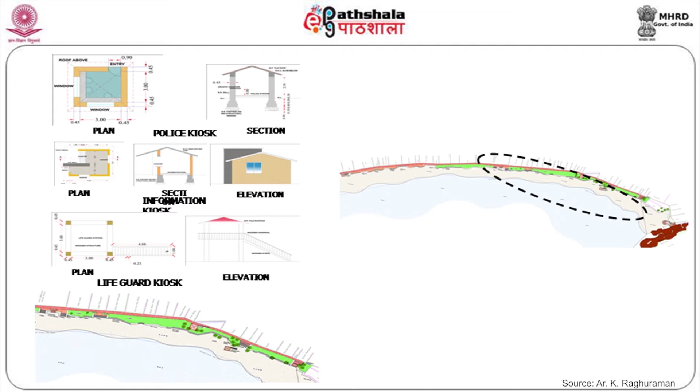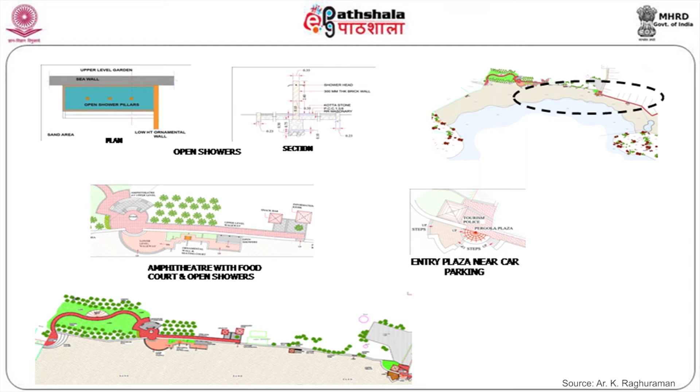Amphitheater with food court and open shower. You have a small amphitheater for people to have a performance, a birthday party, or any such local activities, plus a shower point for people to use and go back.

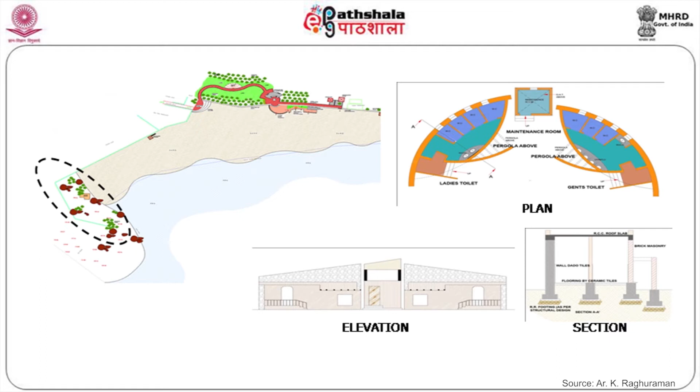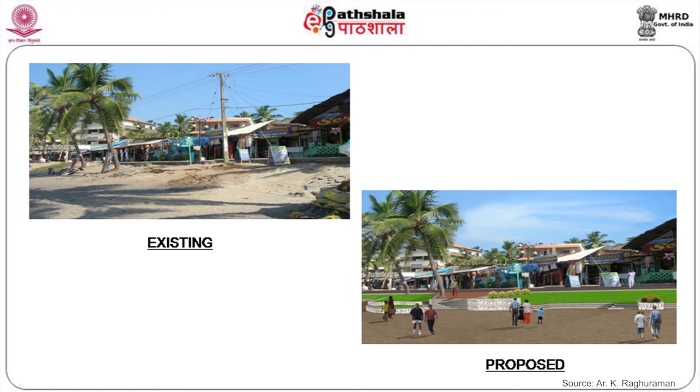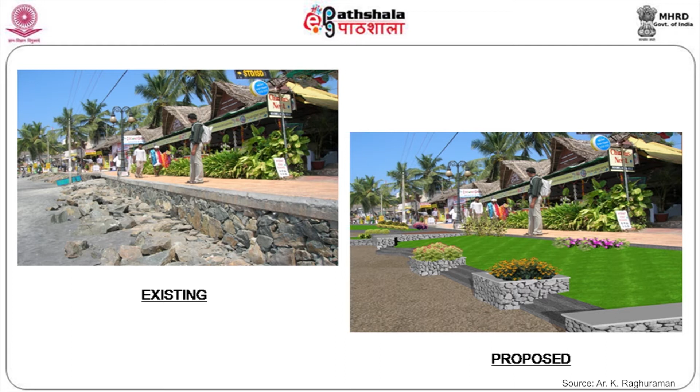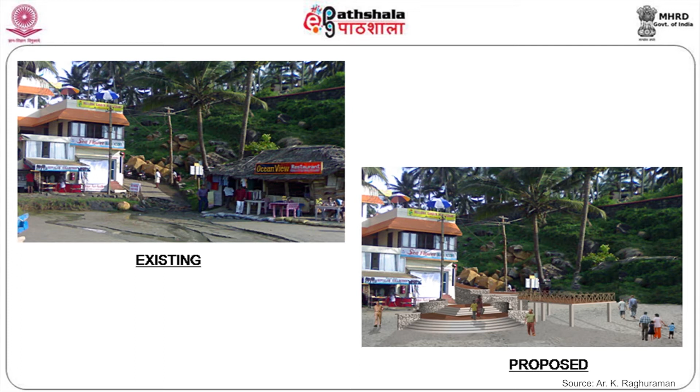Too much of a level difference. So we have to really have a proper slope, a handicap ramp. Everything needs to be taken care of here. We are now going to talk about provision of a walkway in the Kovalam Beach and then in the Varkala area.

In the Varkala area, the walkway comprises almost 4 kilometers of walkway covering different terrains, different land. Varkala beach is a very, very scenic beach with a very high cliff, and then you have to create a very, very safe walking place for the people. Provision of different activities, viewing galleries, viewing towers, sitting and watching areas, shopping areas, lifeguard stations, and all those facilities have been provided for the people to enjoy.

Whereas in the case of Kovalam, we had a raised walkway, really a very adventurous sunbathing place for the people to enjoy. This raised walkway also helped the people to use this 1.5 kilometers of walkway in a different way, and it has not disturbed the fisher folks from their regular activity of going into the sea and fishing. Because of the raised walkway, they never had any problem, and enough bridges in between for the people to take their boats into their houses have also been provided.

Viewing deck and other things have been provided. You can see the photograph and see the places. Now we will talk about the beach landscaping. This is also more on urban landscaping. What is more important to understand is that connecting walkways need to be created for a distance of around 4.5 kilometers.

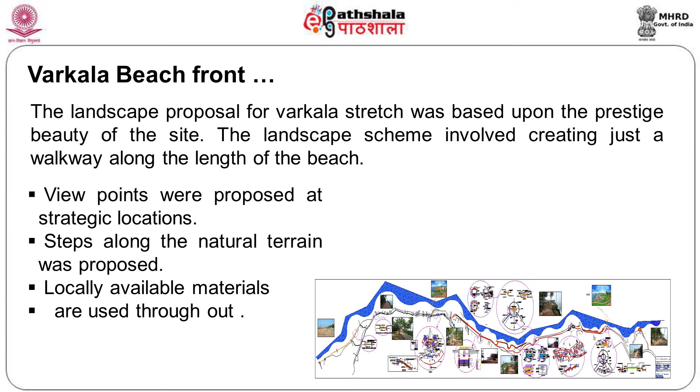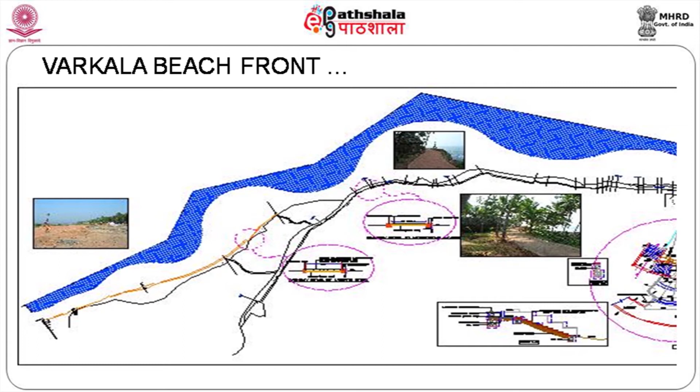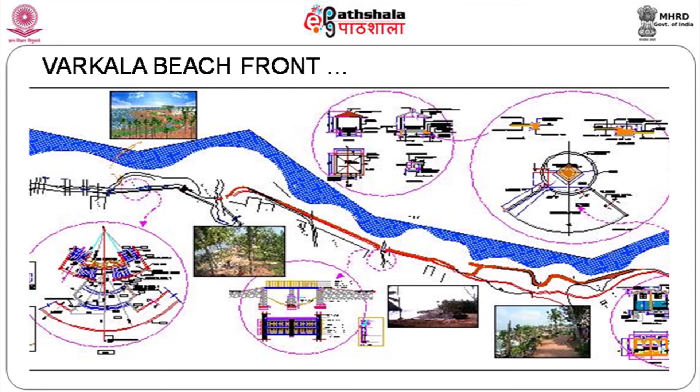So you can see the proposal. Steps are provided at different levels, and walkways are created with local material. Again, you have some viewing decks with shops and other things. You have connecting walkways. You can see the drawing, basically a seating area with a view to the sea. Different types of seating areas, different types of walkways and breakaway spaces.

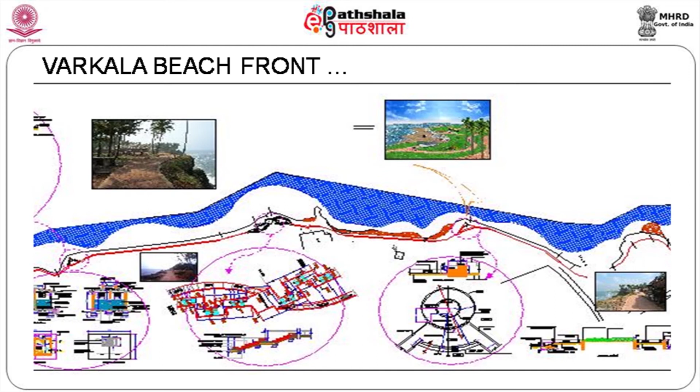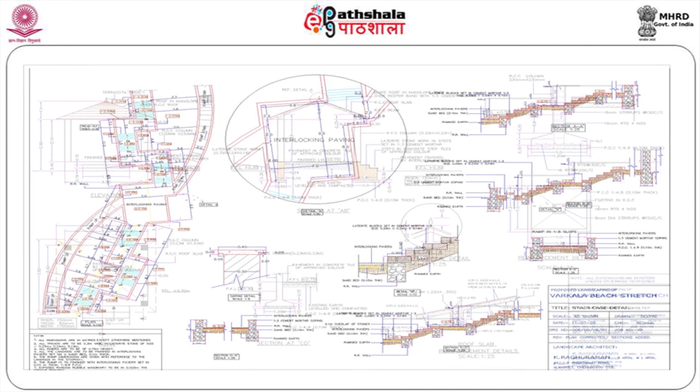Pathways and steps are created in such a way that you won't go to the lower level straight. You will go in a zigzag pattern so that you won't feel the pain of climbing down or climbing up. That was the basic intention. And in between we also provide some rain shelters so that during the monsoon people can take shelter. A different way of getting down to the different levels.

And now, after the development, how it will look. A clean walkway has been created with a swale for the rainwater to move around, and you have natural stones available. This is what I was talking about, a swale, so that your rainwater is not interrupted by your walkway.

Connecting to different levels. A clear walkway with a swale, which I was telling you, for the rainwater to go around. The cliff, edge of the cliff. With the sharp and rural environment for the walkway.

What does the beach do? Beach is an urban open space for the public. So people have to come there, sit and view the beach, then put their feet in the water. Maybe if the beach is safe, they can have a bath in the beach. So a lot of activities take place in the beach.

Plus you have fisher folk collecting the fishes from the beach, and you have boats available all along the shoreline for them to go into the sea and do fish harvesting. So beaches are very important as an open space for the public.

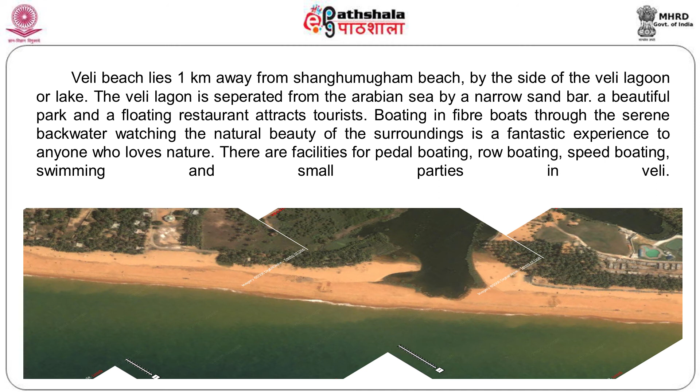Whereas on the beach side, we need to have some kind of an entrance plaza, a walkway, a higher level walkway is required, and then we have to create a node for people to sit and view the beach. Plus you need to have some kind of information kiosk, police kiosk, food courts, etc. are all required. Plus you need a rain shelter also, which is very important in this kind of coastal landscape along the Kerala coast.

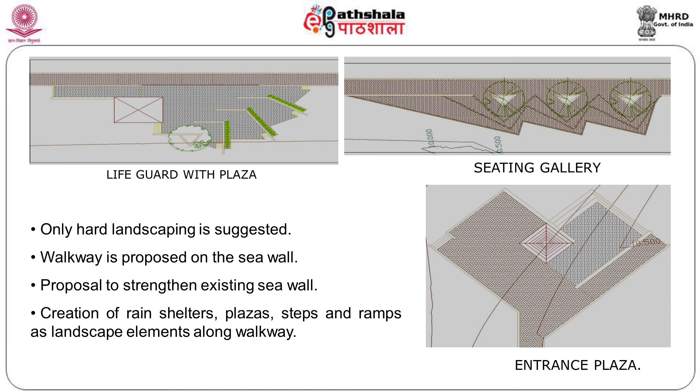So you can see from the drawing, only hard landscaping is being suggested here. So how and what are the basic requirements here? We have differently angled walkways, and it's more of a creation, a designer's creation. The work has been completed also.

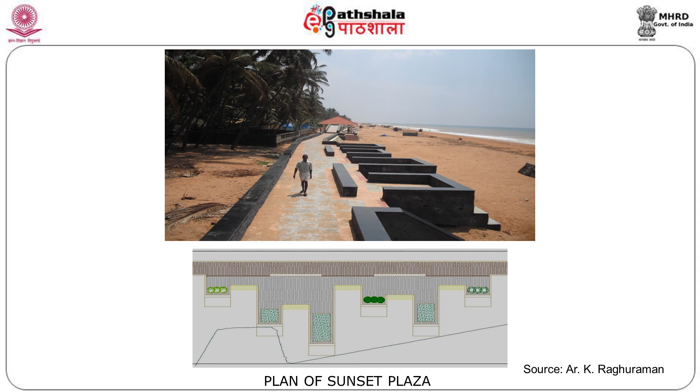You can see the seating arrangements provided, like continuous seating for the people with a walkway, and you have a rain shelter. You have a completed rain shelter with a walkway, steps to climb down to the sea, and continuous seating arrangement available, and different levels are created so that people enjoy walking on the upper level and lower level.

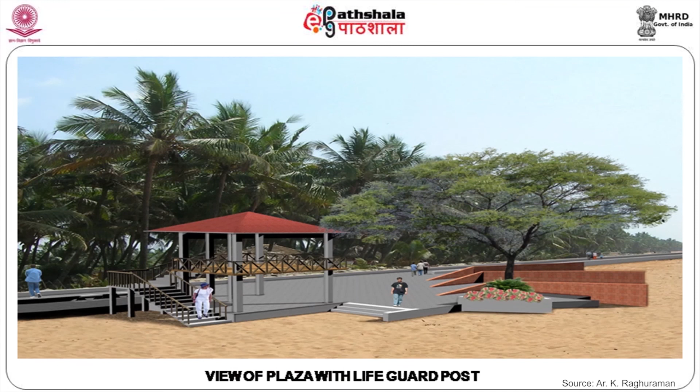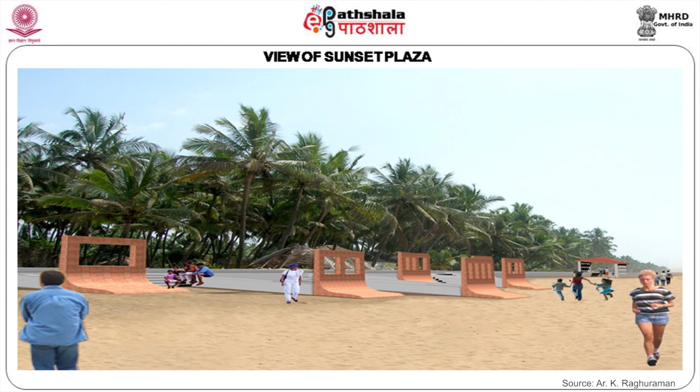Colorful paving pattern, you have nice tiles, anti-skid variety, a flight of steps for the people to come down, differently angled seatings. These are conceptual level drawings, but you have seen earlier how it was completed also. They're all conceptual level drawings. Both the beaches are very dynamic beaches for people to enjoy.

In Veli, it is only 1.5 kilometers of length of walkway. In Varkala, it is 4.5 kilometers. Whenever we go to Varkala and enjoy the place, I always walk from here. I ask the driver to come to the 4th kilometer. You walk and enjoy walking on different levels, and then go to the other place, and the car will come and pick you up. In Veli also, the same thing.

Veli has got a very nice garden space with adventure sports, like speedboats available in Veli. You have floating restaurants available. You have a floating bridge also, a very innovative floating bridge is available in Veli. So all these activities and this particular walkway add to the attractions for the tourists and improve the tourism facility in this zone. Thank you.